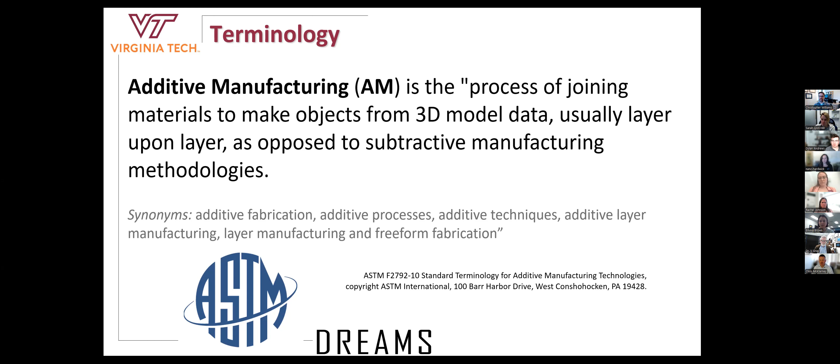There's lots of different ways. And you'll notice the word additive is really critical here because it's to oppose it to subtractive manufacturing, the more conventional: I start with a giant chunk of metal and I'm going to mill or machine away. I'm going to subtract material to get to the shape I want. Whereas here, we're going to add material selectively to get to the shape that I want.

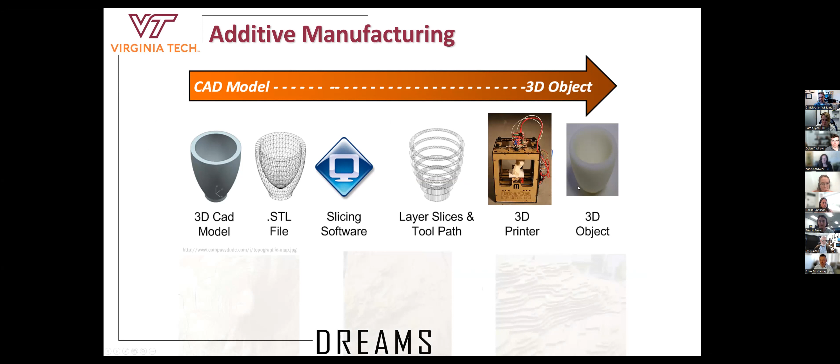So again, in general, what all of these processes have in common is some three-dimensional model on your computer, a digital file, and we're going to slice that into layers and then lay down material layer by layer to build the object. And this is something we've been doing a long time in human history, actually, right? We've always been thinking about creating complex, contoured, three-dimensional shapes by slicing it into layers and then assembling them.

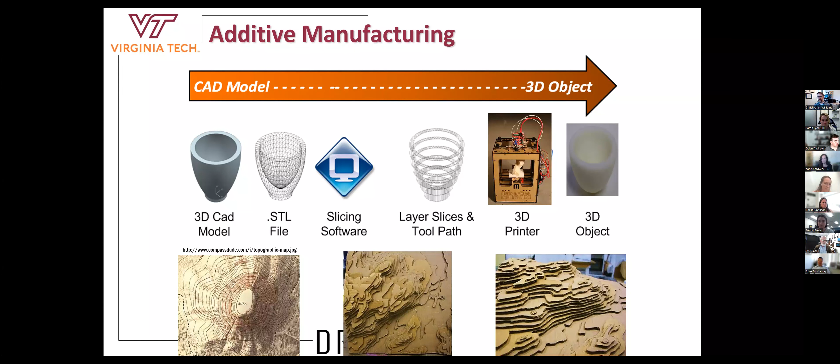So instead of doing the old cartography way, making contour maps, we've just basically replaced that with robots and shrunk the layers down to make them very fine so we're able to create a really nice representation of three-dimensional shapes. So think about it in that context. So again, as I mentioned, we're all familiar maybe with this idea, right? I'm going to feed some plastic in through a nozzle, like a hot glue gun, and I'm going to build this object layer by layer.

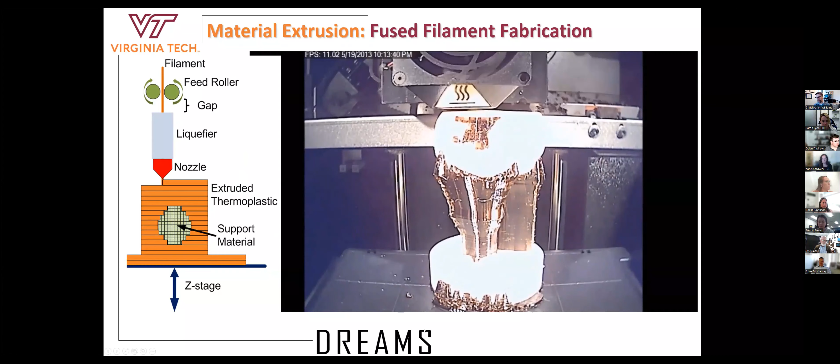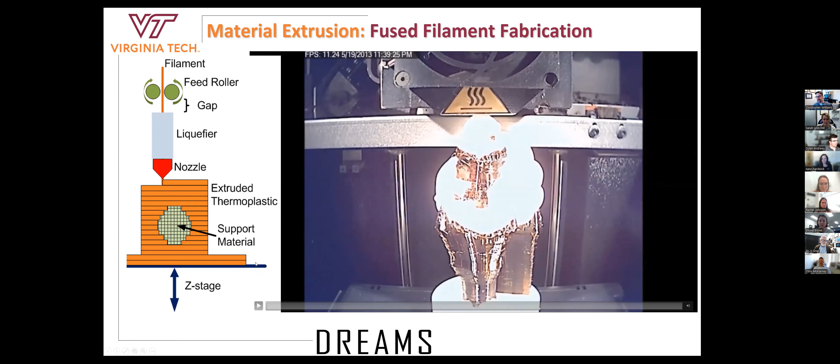But that's just one way. We call that technology material extrusion. Right? I'm going to take some plastic and I'm going to extrude it selectively. And we should mention, by the way, that in that phrase, extrusion, there's a whole bunch of materials. We actually have a local company in town, Blacksburg, called Cell Inc., that uses that same principle, but it's printing biocompatible materials for bioprinting, extruding biologically compatible materials that can be embedded in the human body. So there's lots of different ways of that idea of extrusion.

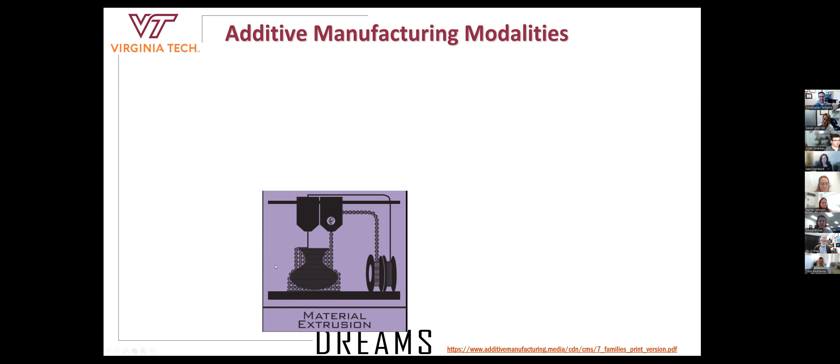But what you might not know is that's just one of 7 different ways of printing. So very big classifications, and there's lots of companies and lots of materials inside each one of these. And they are, again, in common in that they are able to form objects layer by layer. Some of them are ink jetting processes. Some of them are actually using lasers to selectively melt powder. We have other technologies that actually use ultraviolet light to selectively cure resins layer by layer.

And actually, another startup that we have in town uses this technology, vat photopolymerization. So Skyphos uses that technology to make very, very small, very, very precise, lab on a chip kind of devices. So this technology is not just about making Yodas about yay big, but they can make things very, very small. But because of our guests here, we're going to be focusing today a lot on this directed energy deposition technology, which is about making metal components at very large scales very quickly.

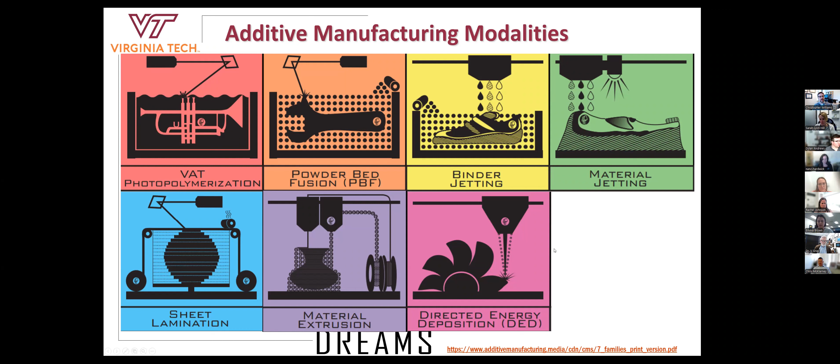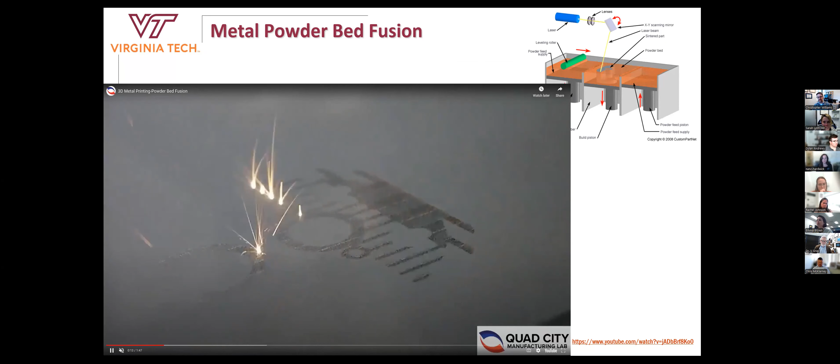So let me tell you a little about one quick other technology, just to give you an idea of other ways that we print: this idea of using lasers to selectively melt powder. And we have a technology like this on campus. And it's probably one of the most commercially adopted metal technologies. This is a quick video of them using a laser to selectively melt metal powder. And you can sort of see that transition from powder state to a molten state. And then when it's done scanning that layer, it will push powder across to recoat a layer on.

And then they'll selectively scan again, and that will melt, again, that area of the layer, but it melts into the previous layer. And at the end, you're almost like an archaeologist. You have to dig through the powder to get your final part.

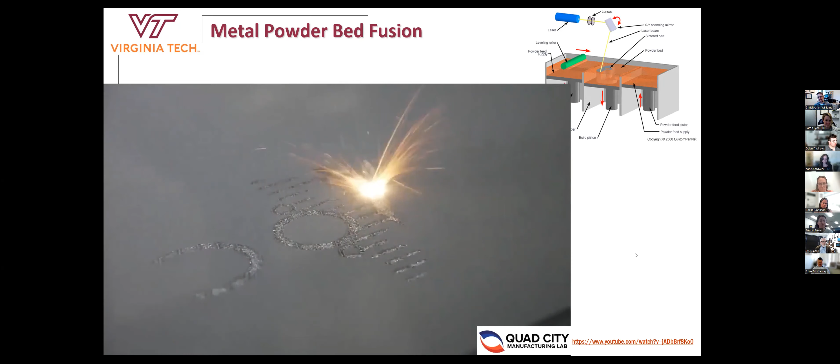And believe it or not, many of you have flown on commercial aircraft with some components made from this technology. Every SpaceX rocket that you've seen go to space uses printed engines. We're seeing a lot of adoption not just in aerospace, but even a lot of medical implants. Some of you might have friends who've had a spine implant or even a knee implant that has been printed with this technology, right? So it's not just plastic trinkets, it's actually also high-end polymers and high-end materials, but also metal components.

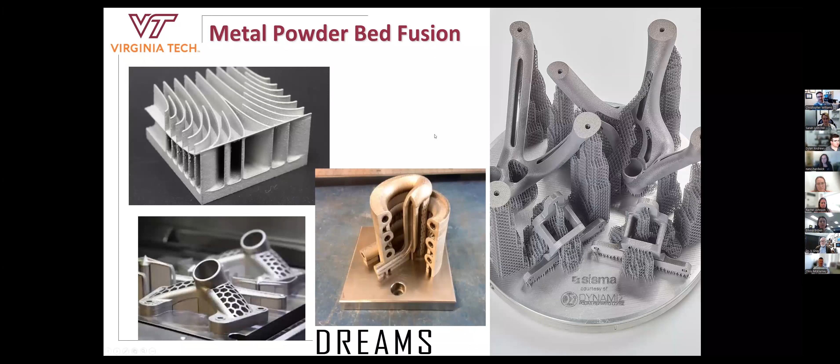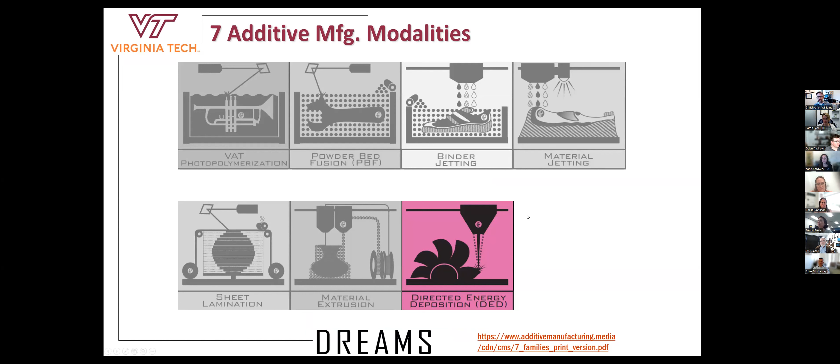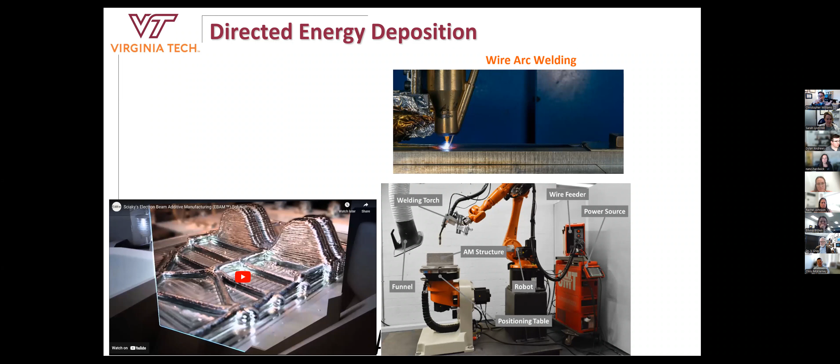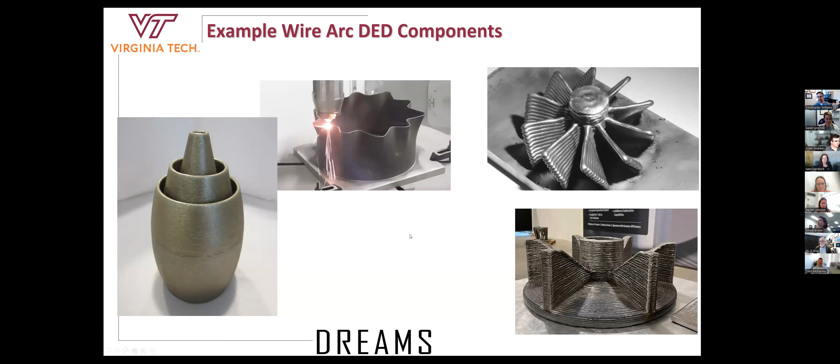So just to give you a flavor for other technologies. Again, as I mentioned, we're going to focus a lot today on directed energy deposition, which is this idea of directly adding material selectively. And one of the technologies we'll talk about is this opportunity. Imagine just taking a welder, attaching it to a robot, but instead of just doing one line of a weld, actually stacking the welds layer by layer and building big metal parts out of that. And so Alan Pierce from FastTech will tell you a little bit more about that technology and how his company uses it in the production of large-scale metal parts.

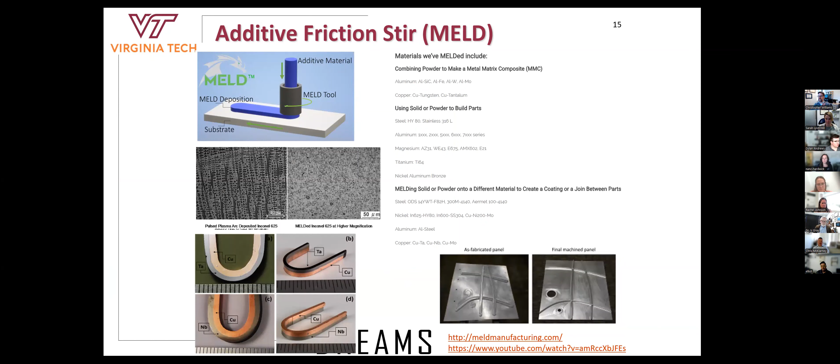Another directed energy deposition technology I'll let Nancy explain is actually a very proprietary technology that was invented and commercialized here in the New River Valley thanks to MELD. And it's a really unique technology that takes another joining technique, in this case, friction stir welding, but does it layer by layer to make very large metal parts.

Before I pass it off to them to explain their technology and their ideas and markets in more detail, I just wanted to quickly give you an idea of how these technologies are used. So when I first started this technology way back in the day, we called it rapid prototyping. It was only really a technology for quickly making an object, making sure everything looked right, and then sending it off to the machine shop to get made. But now we've transitioned to this world of additive manufacturing, where we look to these technologies to make final parts.

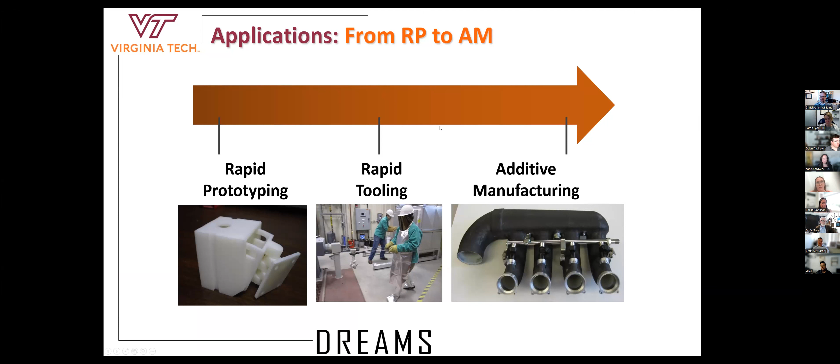So the original idea, and still a very big use of these technologies, is I have some sort of idea. I don't want to invest the time and money and tooling required to make that idea, but instead I want to go to a computer model and then hit print, right, and get a plastic version, a quick prototype. And it allows me to iterate through my ideas much quicker, or I can bring them to my customers and show them a model and say, yeah, so we all sign off on this idea. So it helps with communication aids as well. Again, a very great use of the technology.

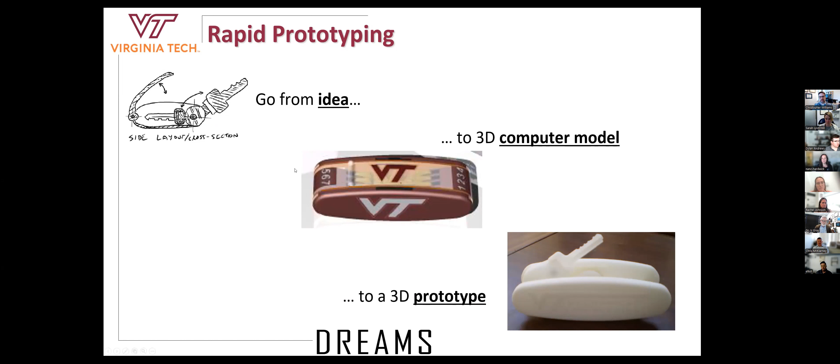But then what we're starting to see is people starting to do more functional uses of these systems. So one of the big ideas is maybe I still am going to use traditional manufacturing to make my product, but I have a lot of tricky operations. I have to do assembly, so I have to jig and fixture everything in place, or I have to do very careful inspection. And I don't want to use my manufacturing tools to create these custom odd-shaped fixtures. I can use this technology to design and quickly make those kinds of jigs and fixtures to hold my parts in place during assembly or inspection, or to aid in traditional manufacturing. So that's another big use case we see in this industry.

And again, every single one of these is made with a different technology. Maybe some of them are made out of metal, some of them are made of polymer, some of them are made out of composites. Each one has its own pros and cons, and that's something we as a community can work together to help with.

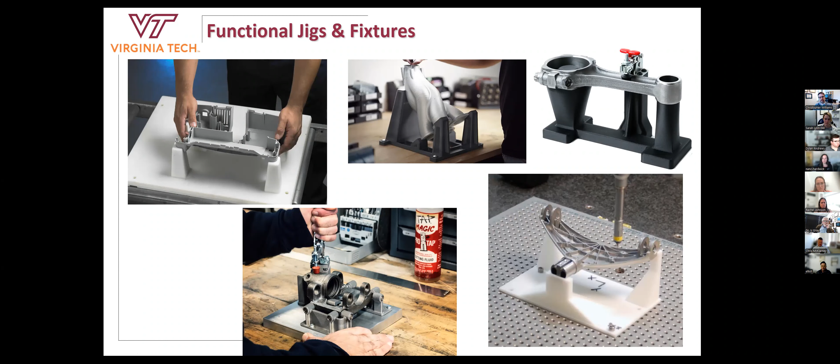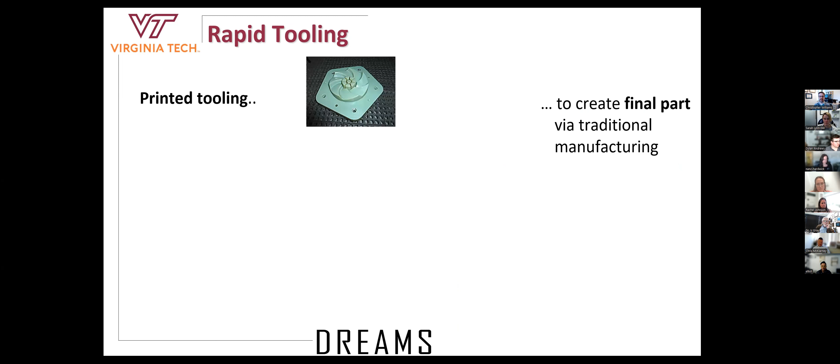The other sort of evolution of the technology is what we refer to as rapid tooling, where we're going to actually print a tool and then use that in traditional manufacturing to make the part. So we're not making the part, we're just making the tooling and fixturing to finish that. We might be able to make a short run injection mold using a polymer additive manufacturing process, just making the mold and then injecting plastic to make the final part.

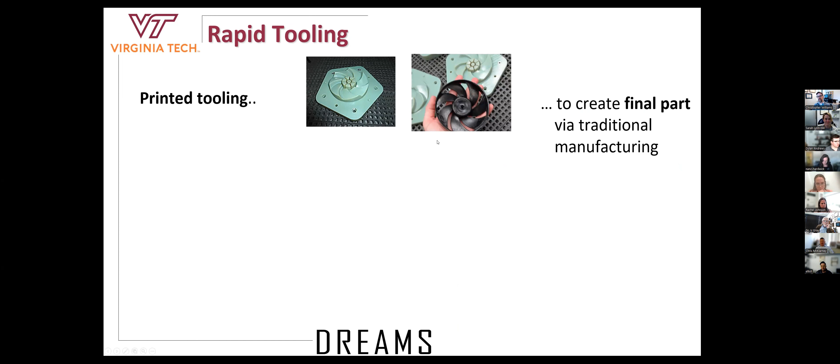There are even technologies that allow you to directly print sand and use it in traditional sand casting. If you don't want to make the patterns and tools, you can actually print the mold directly.

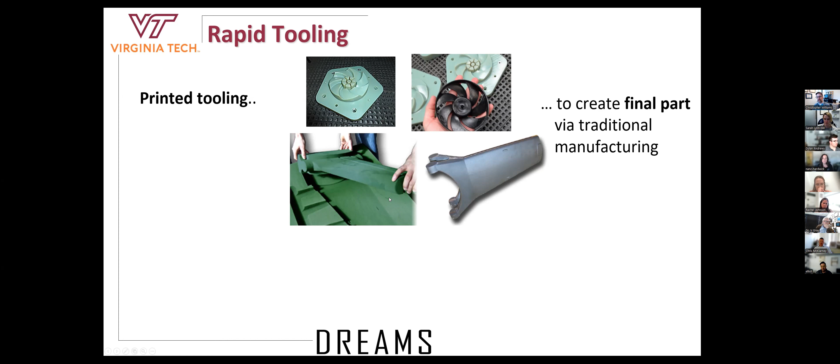And there are large-scale polymer additive manufacturing technologies being used to print very large molds, like this wind turbine blade mold, that they can then use to do conventional carbon fiber or glass fiber layup to make wind turbine blades or other very large-scale aerostructures.

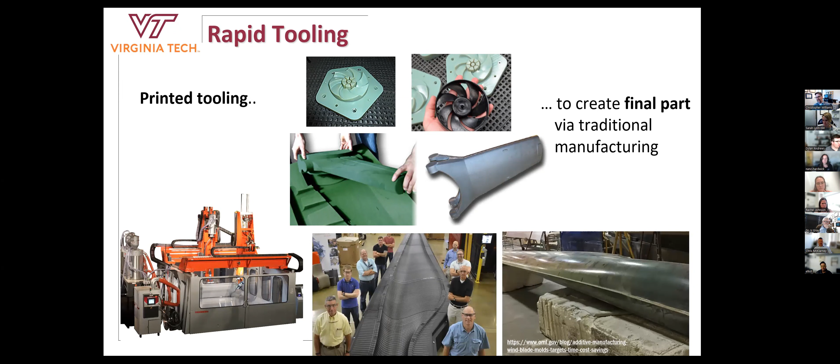So additive manufacturing is not just something that fits on your desk, it's something that fits in half your factory. It's very large systems that allow for the manufacture of very large objects.

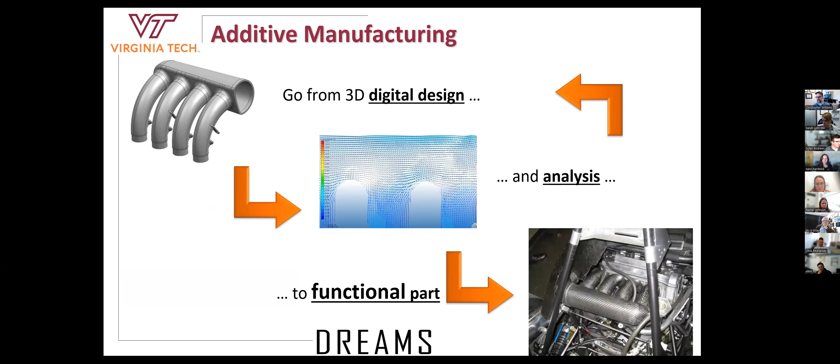What we're really thinking about, and what we often talk about, is this idea of using the technology to take a design, do the digital analysis, and then take it to production and actually use that on a final object. I think Nancy and Alan will talk a lot about this, showing some really cute senior design projects from Virginia Tech.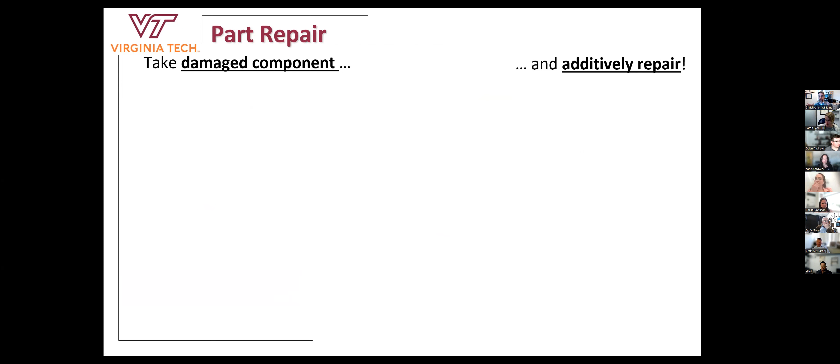The last thing that might surprise you is that these technologies, specifically directed energy deposition technologies, are really unique in that they're also able to repair parts. So it's not about just making an object from nothing - you could actually bring an existing object into your printer and repair or deposit material to fix holes or other damage.

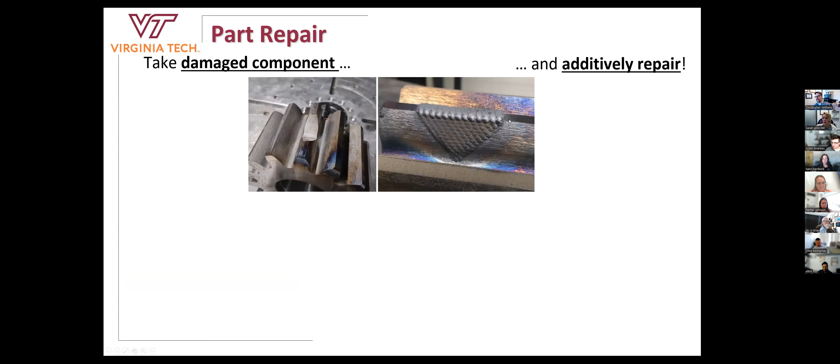For example, I might have this toothed gear here, and with a directed energy deposition system I can selectively weld in and add material, and then take it to my machine shop to remove material. Or again, re-tip turbine blades, for another example.

Maybe Nancy will share some of her company's work in repairing aircraft components that otherwise, with that damage, would have to be thrown away and started from scratch. Here we're able to just directly use that technology to add material.

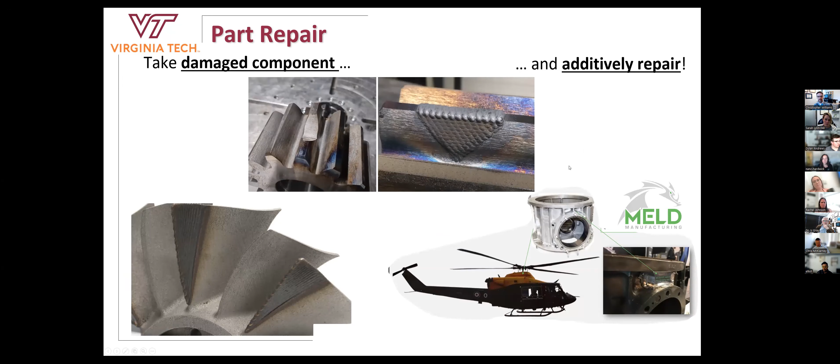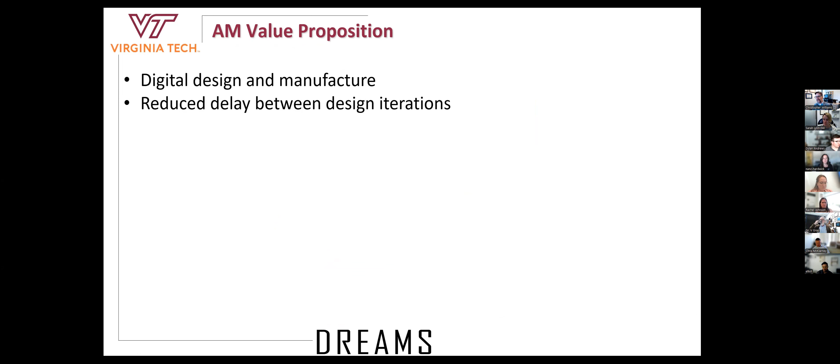So what are the value propositions? I think this is a good opportunity to let Nancy and Alan speak, so I'll just run through these. I think the bottom line here is we have an opportunity with this technology to digitally design and manufacture objects, which allows us to reduce the delays between new ideas.

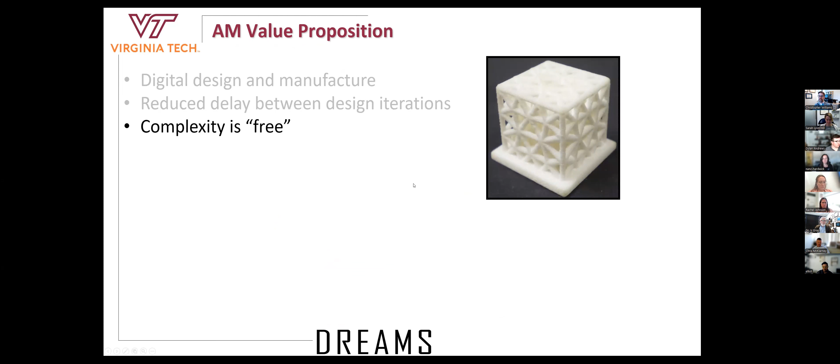Another idea is that complexity is not necessarily free, but we're able to make much more complex and lightweight components than other traditional manufacturing processes allow, because we're able to grow parts and not have to reach in and subtract and mill away material.

We're able to make lots of parts in a single print that are all unique. Some of your friends might have custom-made hearing aids - almost all hearing aids in production now are 3D printed, because each ear canal is unique. Some of you might have Invisalign orthodontics - those are also printed components.

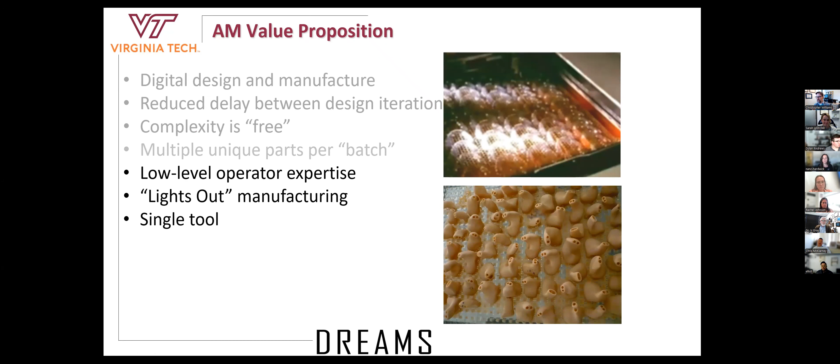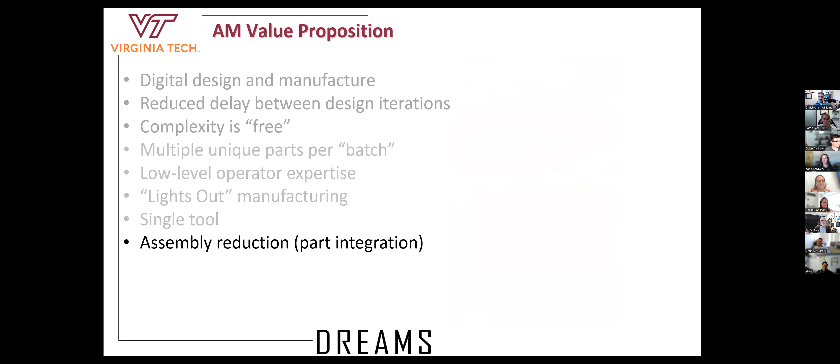This idea means we don't have to delay manufacturing, it's very agile. We have a single tool to make almost any shape, and that saves a lot in production time and training. One of the really nice things is it also reduces assembly, because that complexity allows us to make a single part where maybe we had to make several components and assemble them together.

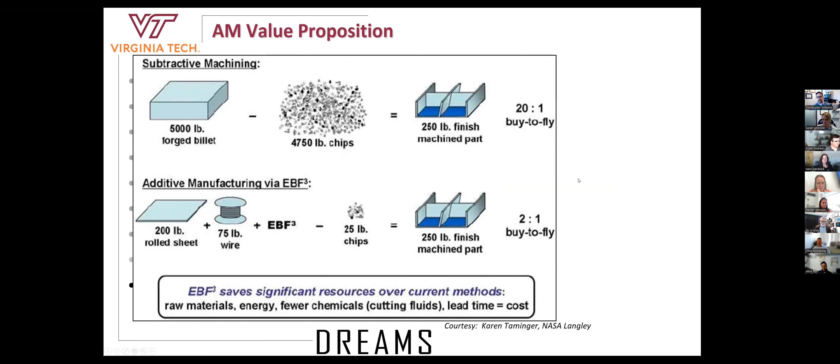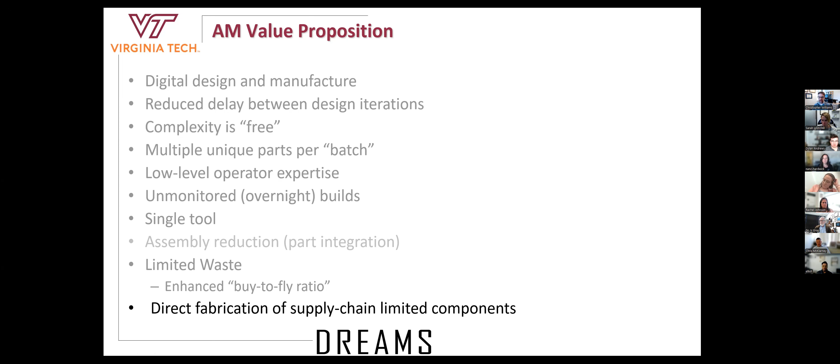I think what you're going to hear from Alan and Nancy is that what we're really seeing right now, especially in the world of large-scale metal additive manufacturing, is that there's a lot of demand for large parts that are traditionally made through castings and forgings, and there's a huge supply chain limitation there. Now these technologies are providing answers to address that.